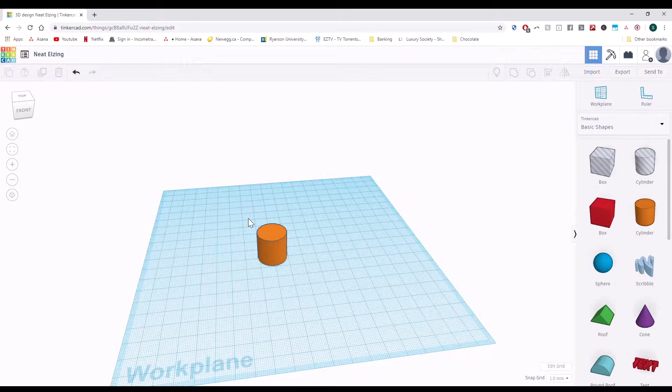How do we make this bigger? Right now, we're not caring about actual size, just how it looks aesthetically, and it's going to be a very, very small mug. So you see these 4 squares on the bottom.

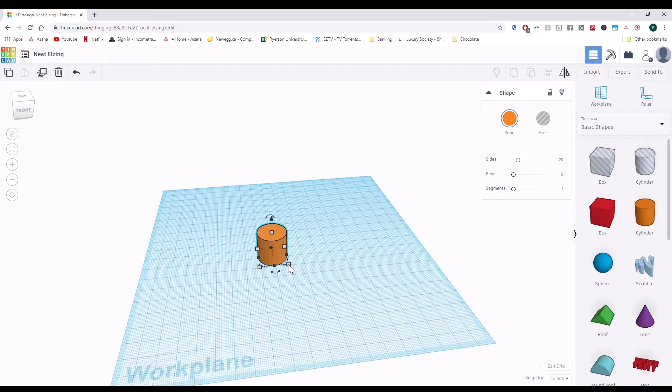That's what's going to change the scale. When I hover over this square, it says 20 by 20. Right now we're in millimeters, so that's 20mm by 20mm, or 2cm by 2cm. When I click and drag, you can see I can change the size. But we want our mug to be a circle.

So how do we change the size and keep it a circle? There's 2 ways. You can hold Shift on your keyboard while dragging, and the whole object will scale. Or you can drag it to however wide or long you want, then type in the same number, say 60 here, press enter, 60 here, press enter, and now it is perfectly square, so in this case, perfectly round.

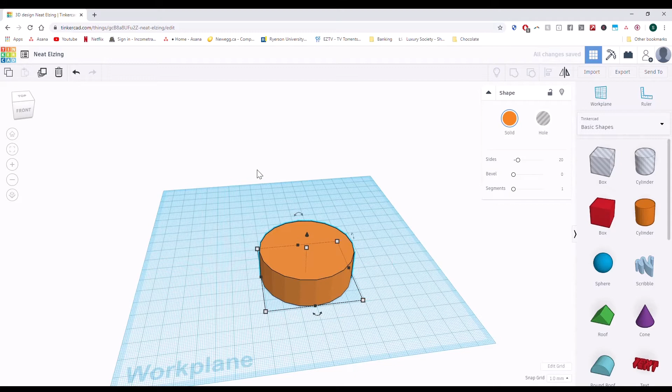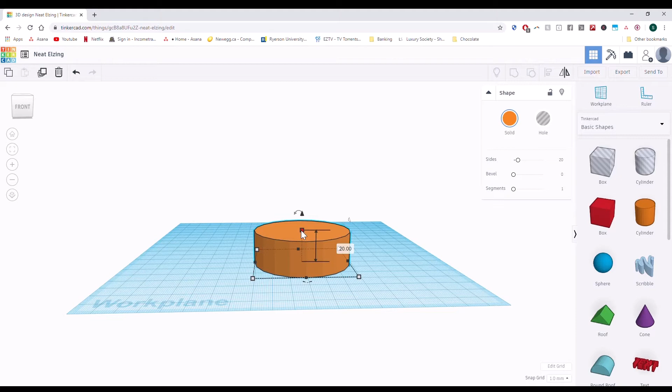If I want to make this object taller, it's easier to do when looking at a slight angle. You see these 4 white squares at the bottom. Those are what make the length and the width different sizes. If I want to make it taller, I go for the middle square right here. This middle white square is how I can scale this up.

Now, that looks about right to me. Let me zoom out a little bit. I'm going to make it a little smaller. And now I need a handle, right? So that's going to be the body of my mug, and I'm going to attach a handle to it. And then I'm going to make a hole.

Why do we do it this way rather than making the hole, then the handle? Well, let's make the handle first, and then you'll see when we move on to the next section, which is how to join things together and how to cut holes from objects as well. Keep that question in the back of your head: why are we doing it with the handle first, not the hole first?

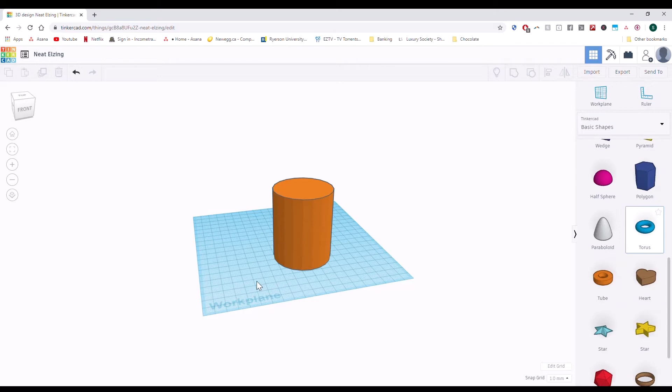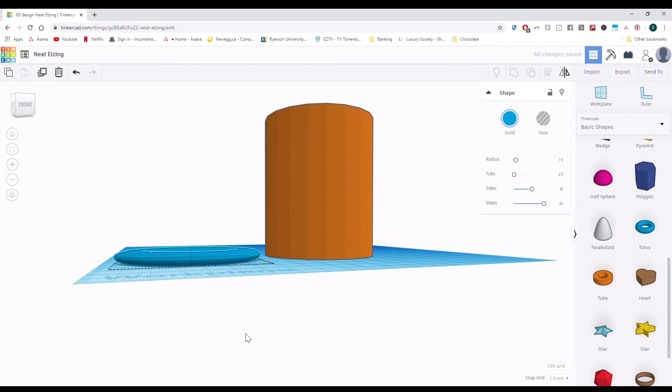If we want to add a handle, we've got basically 2 objects close to what we might want, a torus and a tube. I'm going to use the torus; you can use the tube if you want. Again, we're going to use this to make it however long or large we want. In this case, I kind of want this object to be a bit of an oval, and I'm going to make it not too tall, about there.

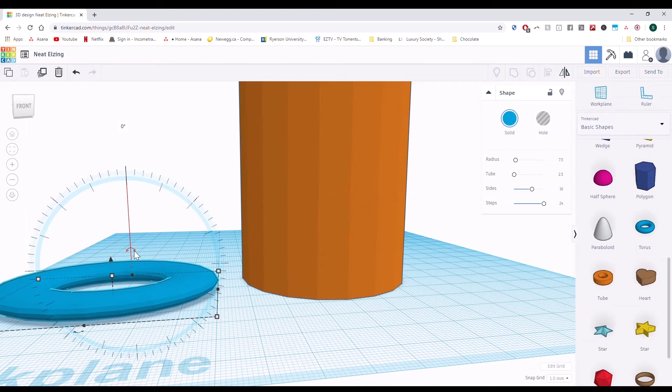So now I want this object in this body at an angle. How do I do that? Pay attention. When I click on this object, it's very faint to see, but you see this double-sided arrow? That is how you rotate things. So if you click on that and rotate, right? Very simple, the double-sided arrow.

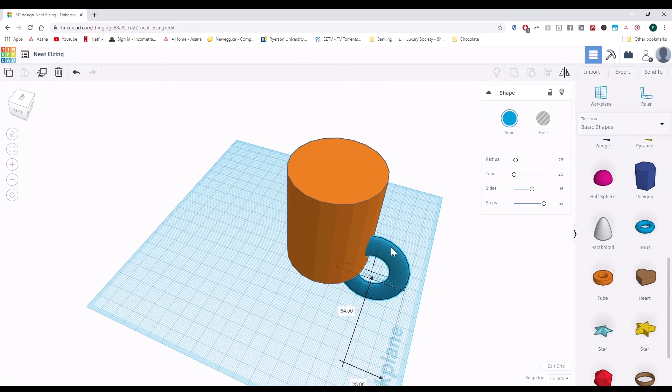Okay, so now we've got it on its side. That's great. Now, if I wanted to rotate it again, I can do that, or I can put it over here just by dragging it. Or I can rotate it once more by, again, finding the appropriate arrow. So this one, if I click on that, it'll rotate it the wrong way. I don't want it to rotate that way.

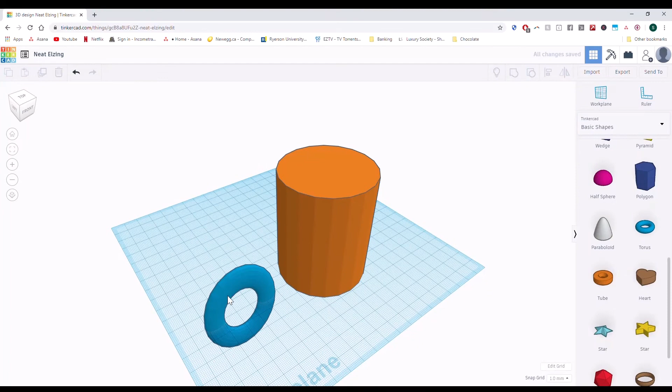I want it to rotate the other way. So if I was here, say, into the page, all right, so it's the side one there. I'll go 90 degrees, perfect. Now, last but not least, I drag my part in and I'm done, right?

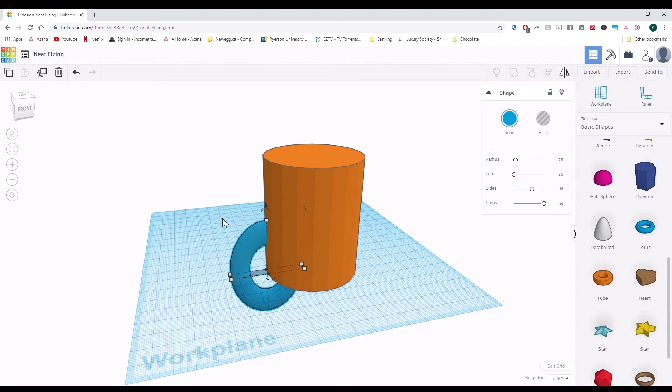Wrong. Why? If we were to actually make this object in real life, you'd never be able to put your mug down on the ground because the handle goes through the table. So I'm going to have to first raise that handle up until it's not going through the table. How do I do that? It's quite simple, we just go on the arrow right here. There's the big darker arrow, and we just drag that up, and it's as easy as that.

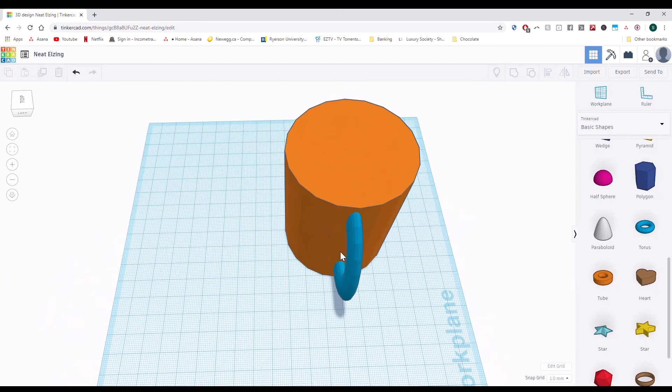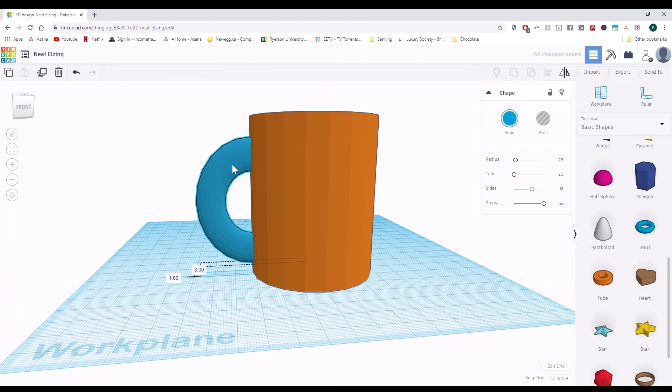And we just want to make sure we're not touching the ground. There we go, we're not touching the ground, and so there we have it. We've made it as centered as we can, we've brought it high enough so it's not touching the ground, and pushed it in just enough so enough is sticking out for your hands. You can continue to adjust the size as you see fit. And that is how you manipulate the size and position of objects in Tinkercad.